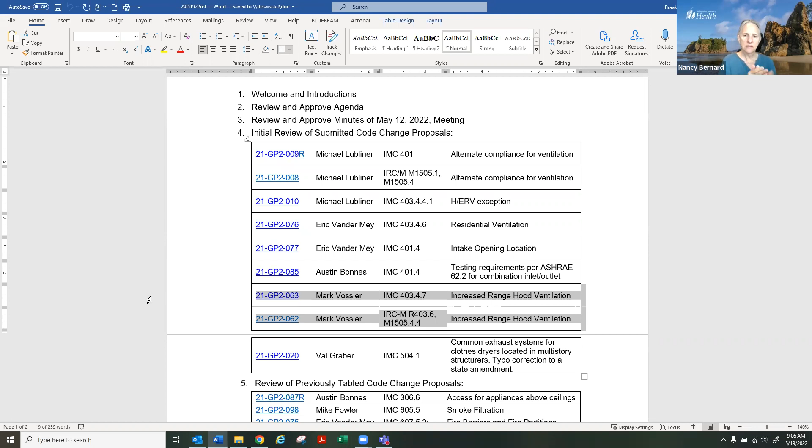I'm Kim Barker with King County Permitting, just observing today. Welcome, Kim. All right, Eric was going to join us. Yeah, I was just in a meeting with him, he's hopping on, he will be on in a second. I don't want to adjust the agenda and then mess up something else necessarily. Yeah, Eric Vander Mey is here also. Yeah, I'm here. Thanks, Eric. Welcome.

Okay, well, let's go ahead and move on to item 2, which is to review and approve the agenda. I think we heard from Mark that maybe it would be helpful to move up his agenda items. And we also heard from Kevin that his proposal that was tabled from last week, maybe so he could get moved up as well to help out those folks in their scheduling. So if someone would like to do that, it would just be a motion to move those items up in the agenda.

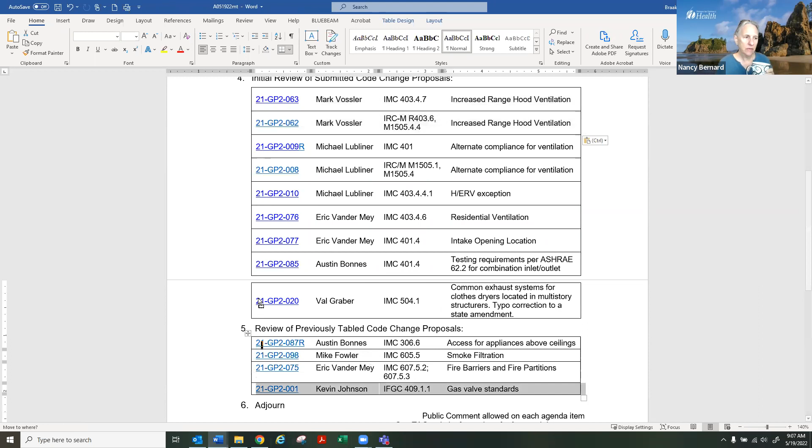We now have an approved agenda. So next up is to review and approve the meeting minutes from last week's May 12th tag meeting. So these minutes were posted with all the materials for today, so hopefully everyone had a chance to take a look at those.

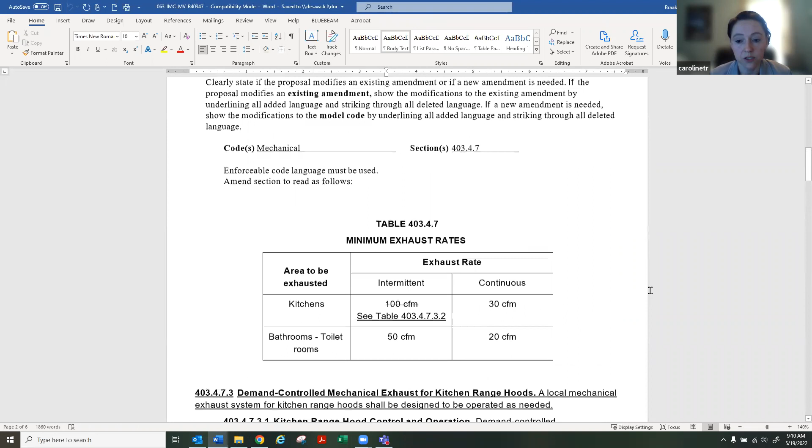So what I'm hoping to do here is similar to last week, to have the individual who submitted the proposal or their delegate present it, explain what it is, why it is needed, and what impacts it will have. Once the proponent has shared all that background, tag members or members of the public can ask questions to get more clarity or better understand the proposal. In general, members of the public are welcome to participate in all discussions, just not permitted to make or second motions or vote. Throughout the discussion, anyone can propose changes to the wording of the proposal, to improve clarity, or to change the requirement.

The tag has great flexibility in how proposals are treated. You can approve them as submitted, approve them as modified, reject them, or table them so additional offline work can be done, or so you have more time to consider them before voting. In general, now is the time in the process to ask all your questions of the proponent to ensure understanding and to propose modifications and edits to proposals, to minimize changes and edits later in the process.

So any questions about any of those process items before we dive in today?

All right. Well, with that, we will turn over the floor to Mark to talk about the range hood ventilation proposals. Thank you, Mark. Thank you. It's a pleasure to be here.

I want to be crystal clear on my areas of expertise. I'm a physician, a practicing cardiologist with an interest in the impacts of air pollution on human health. I'm not an expert in ventilation systems, but I'm coming to you with a proposal because of concern about the health impacts of indoor air pollution, and specifically the risks of gas stoves, where cooking with gas can increase your nitrogen dioxide levels in the home to levels that would be deemed illegal by the EPA for outdoor air pollution.

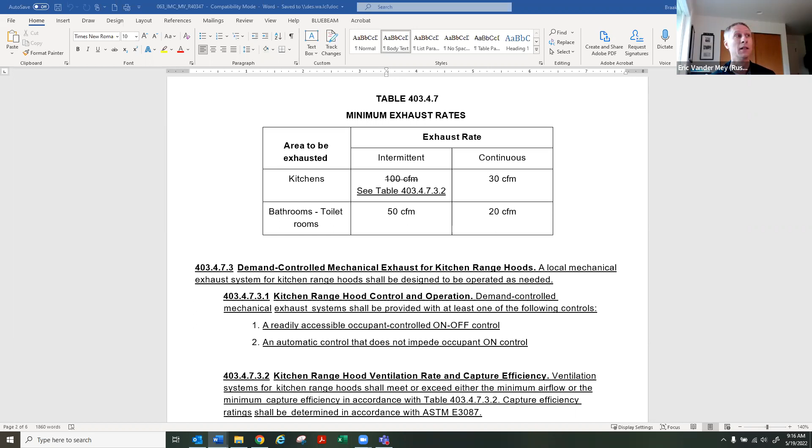Correct. The Washington State Mechanical Code does allow for local exhaust in the kitchen and recirculating range hoods, so that is an option in the code. It can still be these cheap recirculating fans that don't do much good at all if you have local exhaust in the kitchen itself. So you're still required to have an exhaust grill to outside in the kitchen - typically a continuous exhaust grill, connected to the ERV, and then a recirculating hood above the range.

I don't know, unless the tag removed that as part of the 2021 code process - that was an option in the 2018 code. Well, all the research I've seen to date, and some of you may have been following it closer, shows that you really need this capture over the source at the stove to be effective.

Okay, thanks, Nancy. I think next up, Kevin had his hand up. Go ahead, Kevin. Oh, I dropped my hand. I think Andrea's up, but then I put my hand up again, so I'll yield to Andrea. Okay, Andrea, thank you.

So we are opposed to this proposal simply because what we found in research, and the California Air Resources Board cites this as well, is that cooking what you cook - not necessarily the fuel type of what you're cooking on - affects indoor air quality. Also, the performance of vented range hoods varies by manufacturer, so they don't necessarily always operate at their optimal performance rating. We're concerned this is going to add cost when maybe the most effective form of ventilation could be utilized in other ways. For that reason, we're going to be voting against this proposal. Thank you.

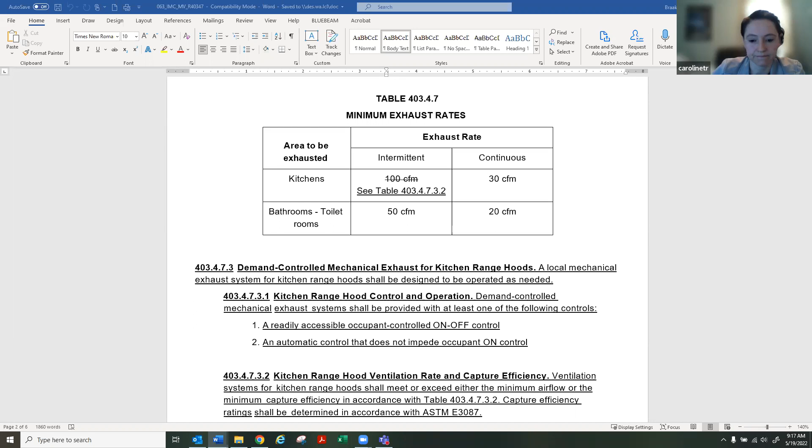Thanks, Andrea. Kevin - yeah, I had a few questions about the proposal. The first has to do with ASTM E3087. I was talking with Randy Cooper with the Association of Home Appliance Manufacturers. He mentioned that that particular standard, how did he put it - is, sorry, I think he said non-reproducible. I'll get the exact quote in a second, but the concern is that it's not a well-baked standard for capture efficiency.

Yeah, it says repeatable or reproducible is the issue. They're still working the kinks out on it, and it's difficult for manufacturers to meet it. So the industry is working on a better capture efficiency standard and are interested in having hoods that are effective. This is working its way through ASHRAE 62.2, the ventilation standard, and the issue of the ASTM test, but also these airflows. So is there any possibility of putting this off until there's a more effective standard?

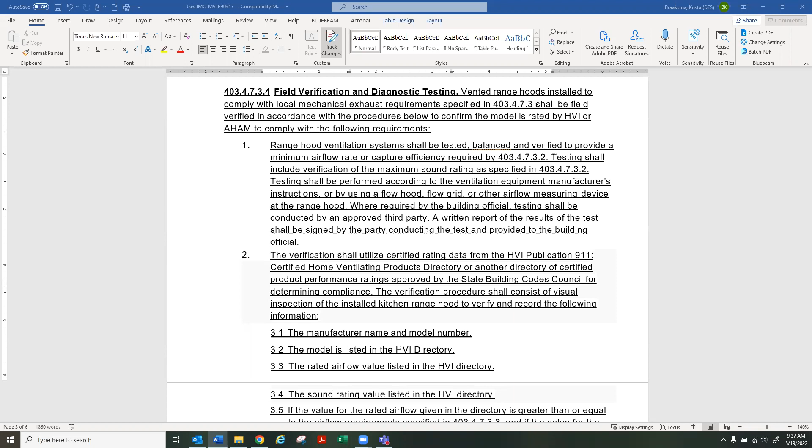And kind of in general, about the testimony here today, I think everybody agrees that the cooking process itself does put off quite a bit of contaminants in the air. Also, nuisance odors is a concern. I just wanted to pose the question to the proponent, if they would support having this increased rate that's listed right now for a gas range, also for the electric range.

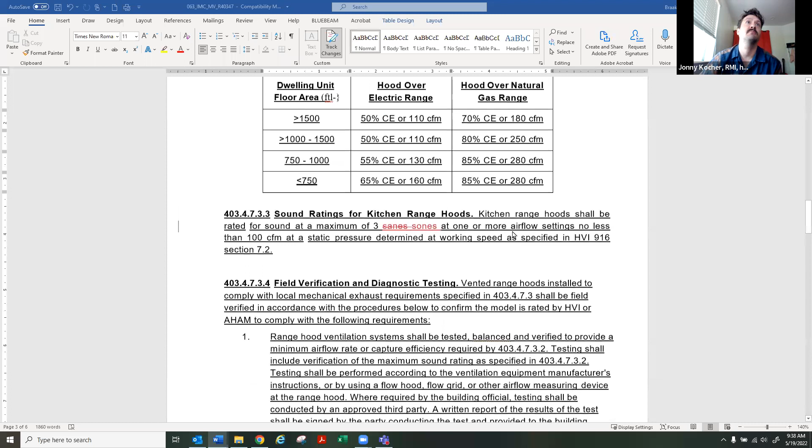Just to clarify, this would be an increase on the electric range, I believe, over base. There is a further increase over natural gas based on the research that natural gas does produce certain pollutants at higher rates than electric. And it's also a requirement for an automated hood for both, which doesn't currently exist. So this would actually increase ventilation for both electric and gas in actuality, because it would actually turn on.

Well, and I guess, is there any downside to accepting this higher CFM rate for the electric? I mean, is there any reason to oppose this higher CFM rate over an electric range? Research doesn't support that it's needed. It would be extra cost for no reason.

Does the proponent have any comment? Yeah, we're clearly not opposed at PSR to improving ventilation regardless. The concern that caused us to look into this was the increased risk of cooking with gas. To be crystal clear on that, several people have brought up that all cooking releases volatile organics and particulates, and that's true. Gas is worse, particularly in terms of nitrogen dioxide, and that's clearly a risk for asthma. And so the reason we are asking for further increases in ventilation rates for gas cooking is because it increases the risk of asthma by 40%.

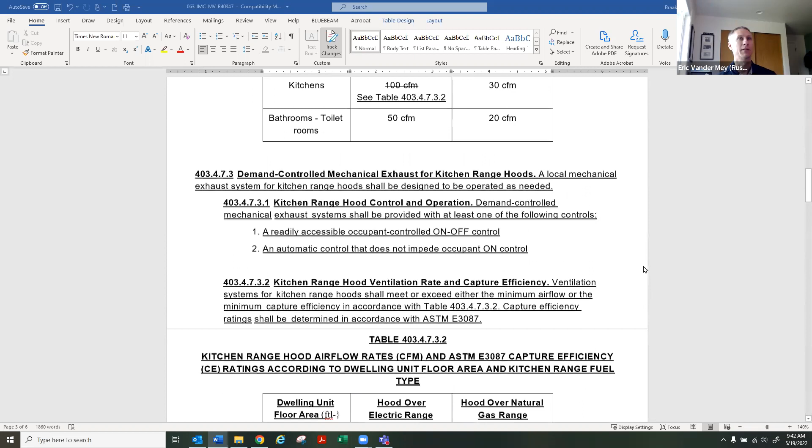So based on how I read this, since this table is only referenced by the intermittent flow rate, you could, as long as you're following the continuous path, whether you did a recirculating range or a ducted exhaust range, as long as you follow the continuous exhaust path from your kitchen with the 30 CFM continuous, you'd still be able to put in any kind of range hood that you wanted.

Thanks, Eric. Yeah, I wasn't really sure what to do in that situation, so I left it alone. But I'm open to ideas on what that might look like.

Yeah, I might reach out to you specifically because you've had a lot of great good faith questions about changes to be made, and might reach out to ask how we might be able to improve the language to be more enforceable.

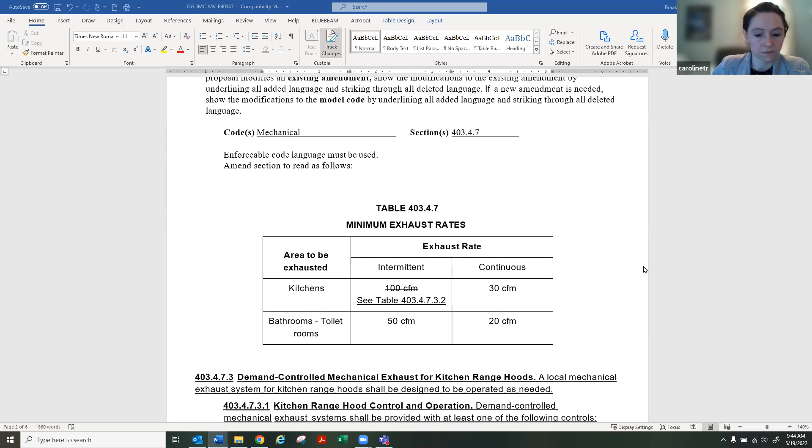Thanks, Eric. Kim. Yeah, thank you. My comment is more of a question about the controls.

I think that if this is passed, in terms of enforcement, the language in the control section could use a little bit more clarity. Currently it just says shall be designed to operate as needed.

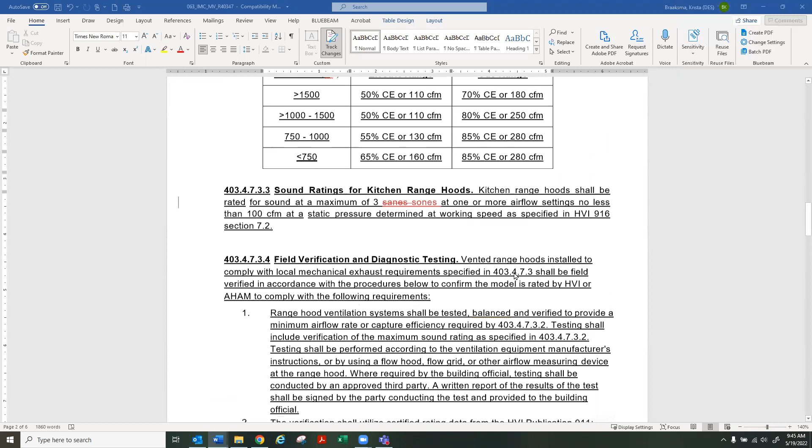So I don't know if the proponent would want to consider more specific language similar to what's in 50711 for commercial hoods, to clarify the interlock and when it needs to turn off and things, so that if this is enacted it would actually function as intended.

That's all. Thanks. Absolutely. Johnny, any thoughts there? Yeah, absolutely. I might reach out to you, Kim, to work on that. Great.

Valerie. Yeah, this table actually eliminates the use of downdraft hoods. It says hood over the range. So it eliminates downdraft hoods.

The table does. And then in 403.4.7.2, there's an exception for range hoods and downdrafts for the HVI listing. So this actually, you need to change that code section as well.

Another thing that is kind of problematic is the different CFMs for natural gas versus electricity. In a home, a lot of times people don't know if they're going to have electric or gas range, so they put both in for the owner, and the owner can change that range at any time. So I think it would be prudent to have the exact number for both, because it's kind of problematic to have two different CFMs for a piece of equipment that somebody can replace on their own.

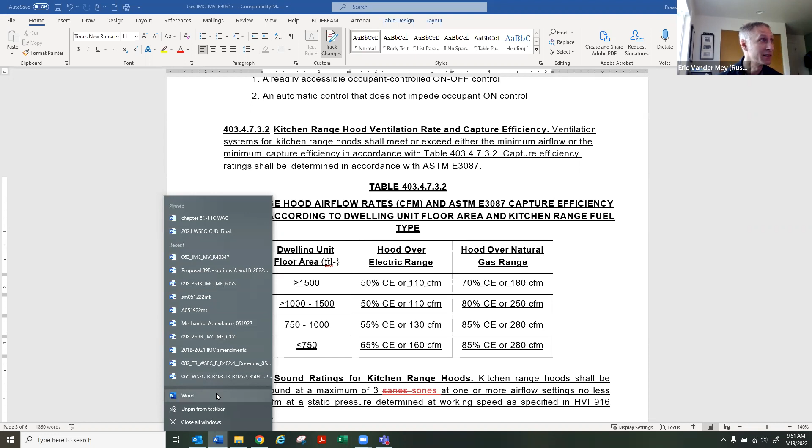I was going to try to answer Kevin's question about whether it's required to be tested. I'm looking at section 403.472, local exhaust fans. I don't know, we'd have to research that one online. I'm not finding it fast here. I know the whole house exhaust fan got codified that we have to test that in 2018. I don't think the local exhaust did. So okay.

Any other comments or questions on this one? I think before we take a motion to table, it sounds like the proponents, Mark and Johnny, have gotten a host of feedback here of things that they can reach out to folks about. It's fine to have offline meetings or working groups, just make sure those folks that participate don't form a quorum of the tag. And then I think we would look forward to seeing a revised version of this. So with that, is anyone interested in making a motion to table?

I'll move tabling. Thanks, Nancy. Is there a second? Would anyone like to second the motion to table this proposal? I'll second the proposal. Okay, thanks, Jonathan.

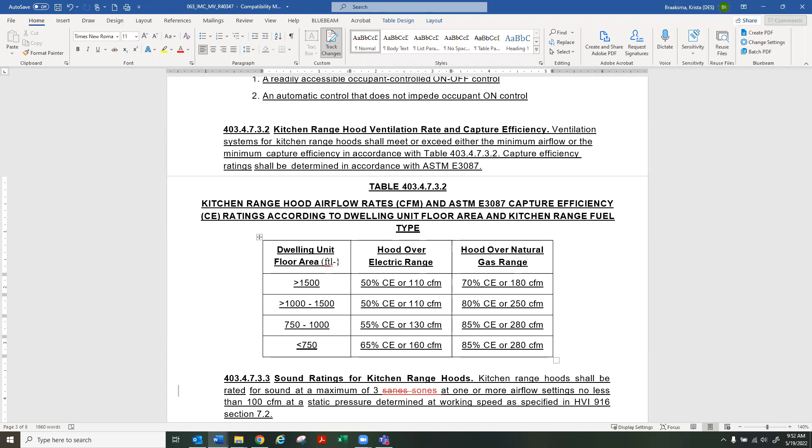Any further discussion? Actually, I don't think we can have further discussion when you table. All right, all those in favor of tabling,

I think we would, just to clarify the motion, there's two proposals, the one for the IMC and the one for the IRC. Nancy, just to clarify your motion, is your motion to table both of those for today? It could be. I didn't know if you had to pull it up separately or not. I'm assuming some of the same concerns will be there since we've talked about them. Okay. And Jonathan, as the second there, are you okay with that clarification? Yes. Okay, great. All right, so everybody's clear.

So all those in favor of tabling, say aye. Aye. Aye. All right, I only heard two voices. Hi, sorry, I was on mute. Brandon, we've got three. Any opposed? Say nay. Nay. Nay. Okay, I think that was 3 ayes and 2 nays. So the table has it.

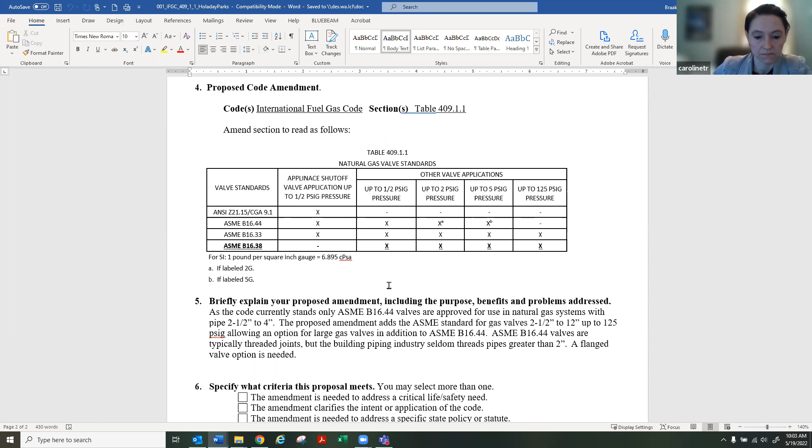Hi, Kevin, this is Valerie with the City of Bellevue. In the IFGC it requires any piping larger than 4 inches to be welded. Under fittings, you can't have a threaded fitting larger than 4 inches. So that's really the only code we have that's for welding piping, I guess you'd say. But yeah, I can see this being needed in the code.

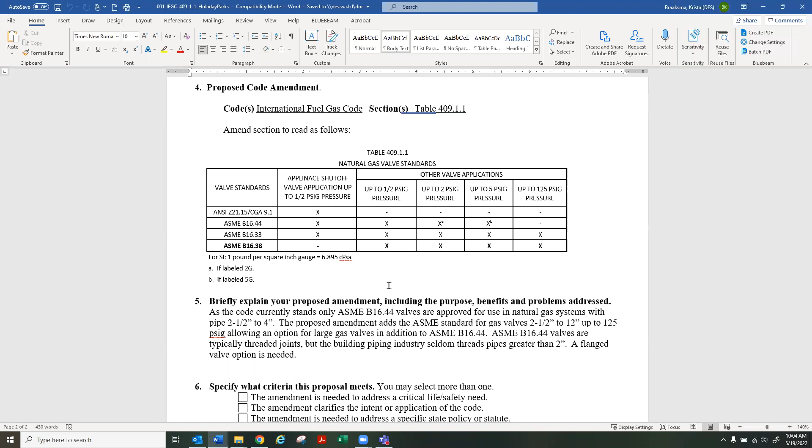Yeah. And then you will need to add it to the references as well. Sure. Yeah, okay. I haven't - I think Valerie, way back in there.

Anyway, I think you and I worked on one of the projects in the 4 towers over at 8th Avenue. I think we had like 6-inch piping, and that was low pressure stuff. That was all welded, of course. But it sort of plagued me since then that, geez, I'm putting in valves that are greater than 2-inch. And while there are plug valves and ball valves that are flanged that are ASME B16.33, those aren't specifically part of that standard for greater than 2-inch pipe.

Now the same valve - I have Apollo valves, Nibco, Milwaukee, and other valves - the same valve is both ASME B16.33 and B16.38. But because ASME B16.38 is not in the code, typically we wouldn't be allowed to install those. So I agree, and that's why we're doing it.

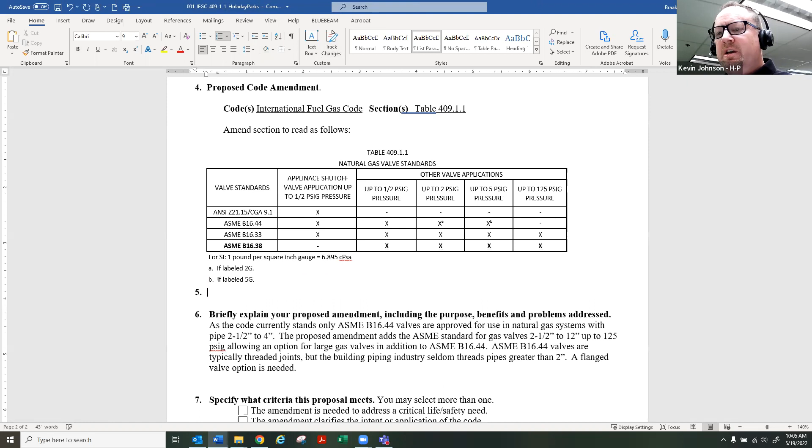I think this would give the industry a good option. And let's see if we need to put it in the reference. I guess we need to. Looks like Caroline, are you making the change? Krista's driving there, I think, just to add a note to make sure this new standard would get in there.

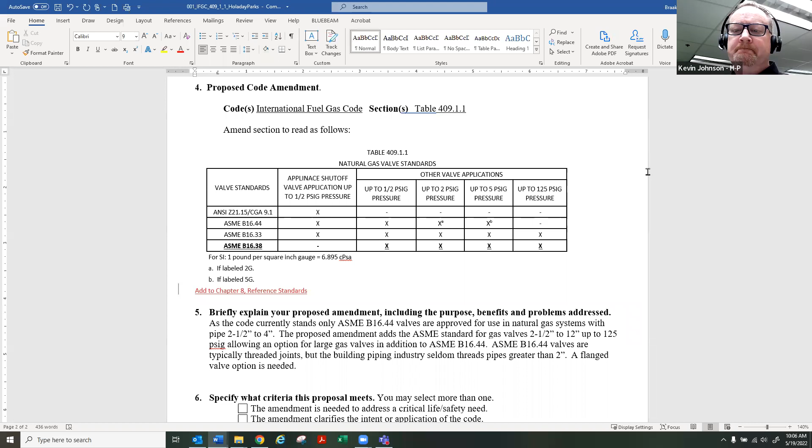So Kevin, is this seems like maybe not a Washington specific issue, maybe eventually something - it's eventually something that I think needs to go to the base fuel gas code. Yeah, okay, great. Any other questions or comments for Kevin?

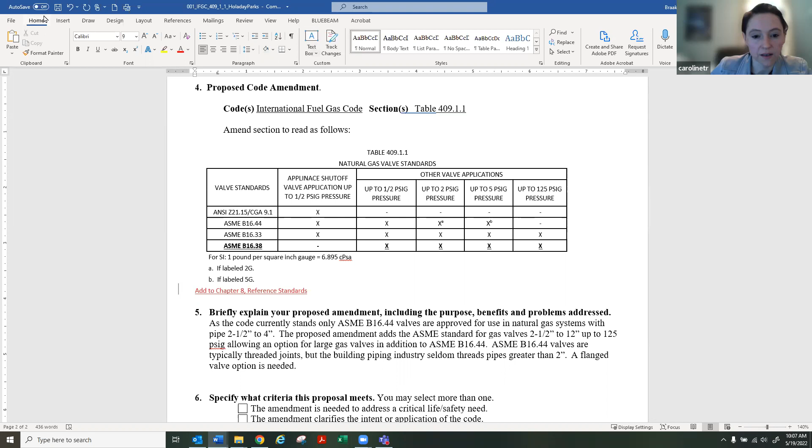Second. Thanks, Jeff. Any further discussion? Hearing none. All those in favor say aye. Aye. Aye. Aye.

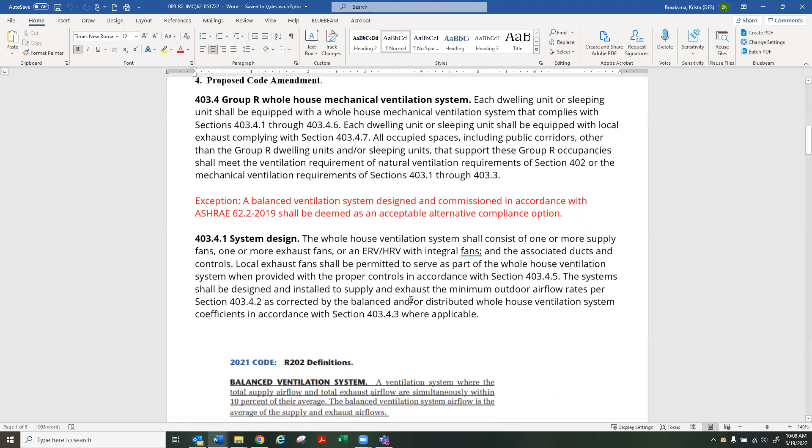I don't think I'll say prepared, but I will do my best. Thanks, Jonathan. So my understanding, this particular proposal here was just to get included the 62.2 2019 version of ASHRAE as an acceptable path as well. And I believe the term balanced was very important to Mike when he designed it, to make sure that it was a balanced ASHRAE commission system for residential R2 group R2 designations.

All right, any other background info on it or explanatory information for the tag to consider? Mike was pretty passionate about it. I believe it's a little bit more of a stringent ventilation to the mechanical. I am not 100% up on this, I do apologize. My understanding, it's just an optional path to use a little bit more of a stringent code versus going back and forth between the IRC, the IMC, and the IECC for Washington stuff.

Okay, thanks, Jonathan. Questions or comments on allowing 62.2? Eric, go ahead.

So I think this was discussed in past code cycles. The last discussion was that it would be hard for code officials to enforce multiple different standards. So I think that's why it was left out of the code. A lot of these small multifamily residential buildings, some of them don't have engineers of record because they're not required. So one recommendation to the tag, maybe if we're going to allow this, the plan set has to be stamped and signed by an engineer of record, even for small projects, to give some comfort to the AHJ.

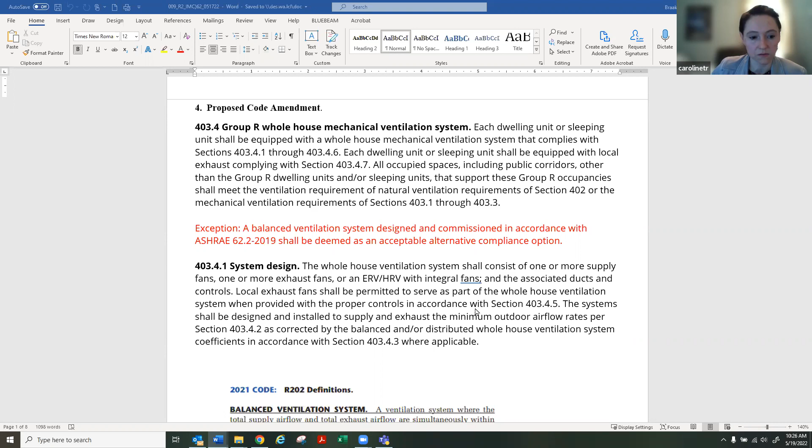You can also just reject this proposal, or we can obviously just approve it as it is. So lots of choices for tag members to consider.

Do we know if Mike is barred from doing this because of his current role and some sort of influence issue, or is it that he just isn't given the time to be on these meetings? He was not allowed to. He had to release all legacy work. Okay, so maybe it's not a conflict of interest, it's just not part of his new job. I believe it's the National Labs standing policy.

Got it. Yeah, I guess my vote would be to table this for now. I haven't had a ton of time to review, and the ASHRAE standard, I'm looking at it now, but there's a lot in it, so I'd prefer to table it.

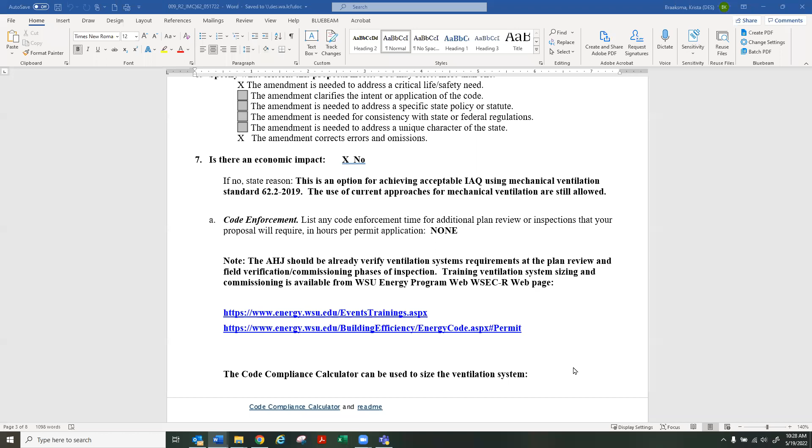Okay, is that a motion? Yes, I'll move to table this amendment. I'll second. Okay, we have a motion to table on the floor. Don't think further discussion is allowed, so all in favor, say aye. Aye. Any opposed, say nay.

So that one will come back, I think we will revisit it, I guess. Jonathan, are you kind of inheriting it to potentially address some of the questions or concerns raised today? It sounds so. So I'm sure I'll be downloading that free version of ASHRAE 62.2 that's read-only I just heard about.

Okay, thanks. And Eric? Yeah, I guess one more editorial comment would be, so Washington State Mechanical Code section 403.2 has similar language for 62.1. We might want to develop the same language as that just to be consistent, so if we're looking at alternate proposals, that language refers to specific sections, so that would be a good model to use into how to write that code to try to clarify the intent.

Thanks, Eric. Let's see. So Krista, this is the same idea, just relative to the IRC. Yes, and written slightly differently.

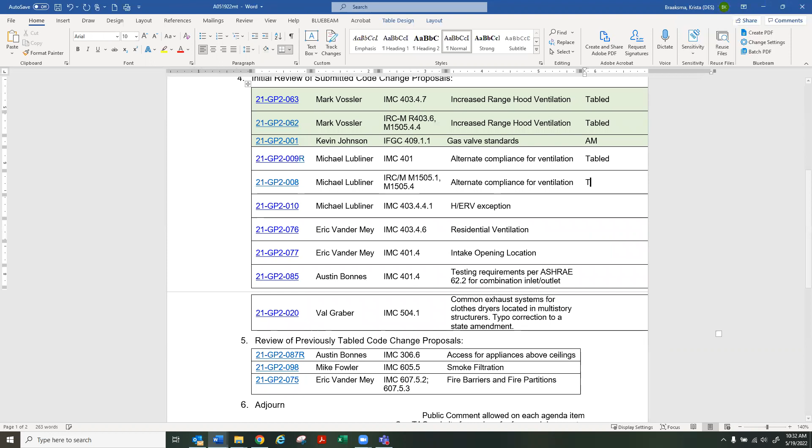And that moves us along to Mike's next proposal. Jonathan, was this one also on your radar to represent? It is. Great, floor is yours.

I believe this one is adding the exception that heat recovery or energy recovery ventilators is not required in low-rise multifamily projects. They're trying to keep it to balanced ventilation systems, right? This language here would add an exception for heat recovery and energy recovery ventilators not required in the low-rise. I apologize, I'm just trying to scroll this, but this isn't my document. I need to open mine. Could you scroll down just a little for me, please? Thank you.

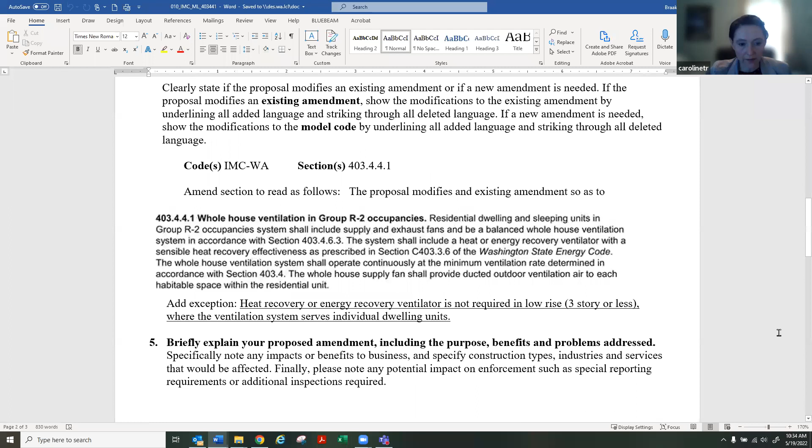Krista, do you mind scrolling back up to the actual code language? So I guess one question I had as I was looking at this one was, I think the exception could be helpful and just clarifying the requirement. But one thing that I think is interesting is that this paragraph that it would align with states that dwelling and sleeping units in group R2 shall include supply and exhaust and be a balanced whole house ventilation system. And then that next sentence says the system shall include a heat or energy recovery ventilator with a sensible heat recovery effectiveness as prescribed in section C403.3.6 of the Washington State Energy Code.

So that is the commercial energy code, and only R2 of 4 stories or more has to comply with the commercial energy code. And so that's all to say, as it's written right now, that sentence would not apply to low-rise R2 because low-rise R2 does not comply with the commercial energy code. It complies with the residential energy code. So anyway, that's all to say, I think maybe that's the logic path that gets at, Jonathan, what you're trying to do. All that said, it could just be more clearly stated, because I think the intent of this proposal, just to clarify that, might make sense.

Yeah, it's just a cleanup one, is my understanding. Okay, Eric. Yeah, I agree that the body of the code is clear, that the second sentence only applies to projects that are under the C sections of the code. That was how it was written. So yeah, assuming that there are no code proposals on the IECC residential building side of the code that would require this, then this would be essentially a redundant exception that would add clarity to the code.

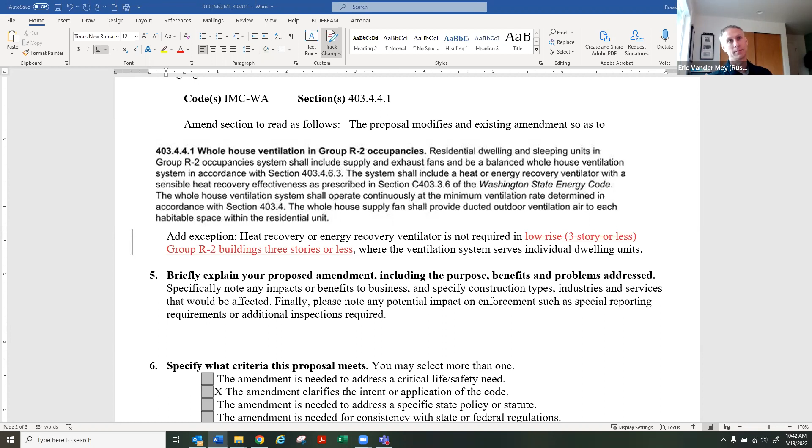And then I guess ERV, HRV in residential buildings is part of the option point system, right? So it's not required, but it could be an option point they're going after. So anyways.

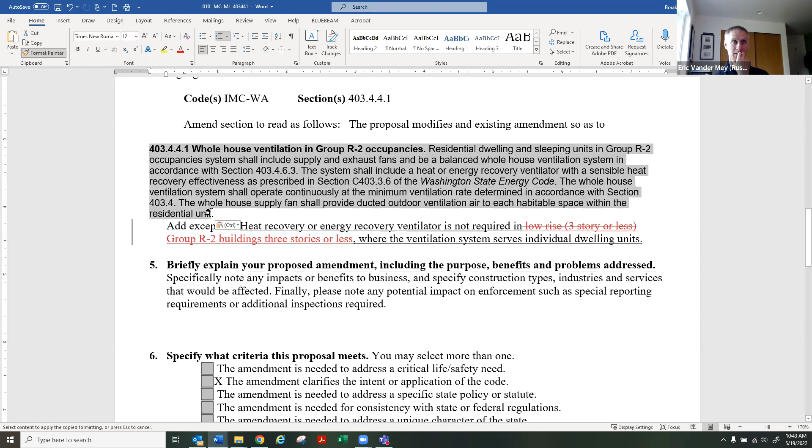Okay, well, maybe I hate to table another one. Does anyone else want to chime in with a better thought? Yeah, I guess, Krista, do you think it's better as an exception, or should that sentence just be in the body of that paragraph as additional clarification?

I don't really have a preference either way. You could say something like, where selected as an option per R406, so then it just implies that it's not required in the main body of the paragraph. So heat recovery or energy recovery ventilation is an option in group R2 buildings 3 stories or less per the...

Well, I was just thinking in the second sentence in the paragraph, you could say as prescribed in section C403.3.6, or when selected as an option as part of R406. There you go, I like that. I like it.

C or R406? R406, I guess I got to go check R406. No, you're right, it's in R406, unless they decide to move it in the energy code to match the national's R408 or something like that. It might move, it might not, I doubt it. It's going to be, you have to rewrite that section with the new 2021 section.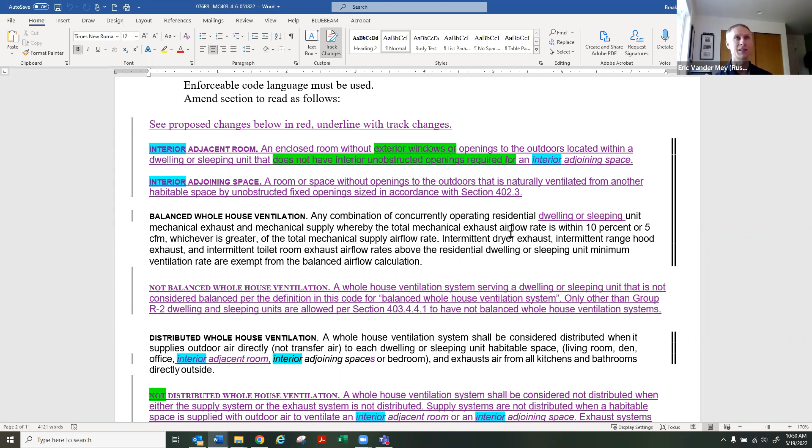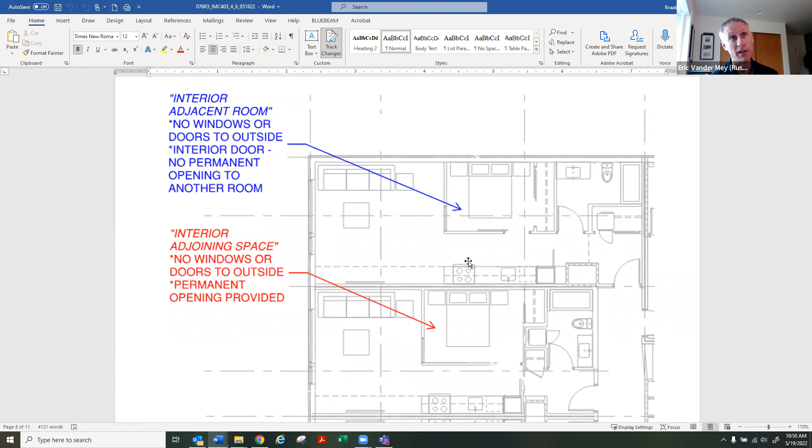Krista, can you scroll down to the diagrams at the end? So in a lot of these multifamily, we've had various provisions through the last 3 or 4 code cycles on how we treat these interior spaces. Typically, these are interior rooms within the apartments that are oftentimes bedrooms, or sometimes studies or dens within the units. Most of the time they're on the interior of the building. Sometimes you have a zero lot line configuration like the one at the top of the page here, where it's actually on an exterior wall, but there can't be any windows because it's a zero lot line configuration, so there's an adjacent building or something there.

So based on discussions with City of Seattle, they thought it would be simplest to create some defined terms. I originally had started with adjacent room or adjoining space. Unfortunately, those words are used throughout the building code in various places as undefined terms. So I chose to make it a more specific term and call them interior adjacent room and interior adjoining space, so it's a very specific term we can apply, and would only then apply to how we're using it in this section of the mechanical code.

So we're creating two of these. The basic idea is that an interior adjacent room has no openings, doors, or windows to the outside, and it has no permanent opening to another room. Most of the time, developers of these projects and occupants want a bedroom door on it, so they want sliding doors or something to close that off. And that does not meet the definition of the building code or mechanical code for an interior adjoining space, because it can be closed off—it has to be a permanent opening to meet that definition.

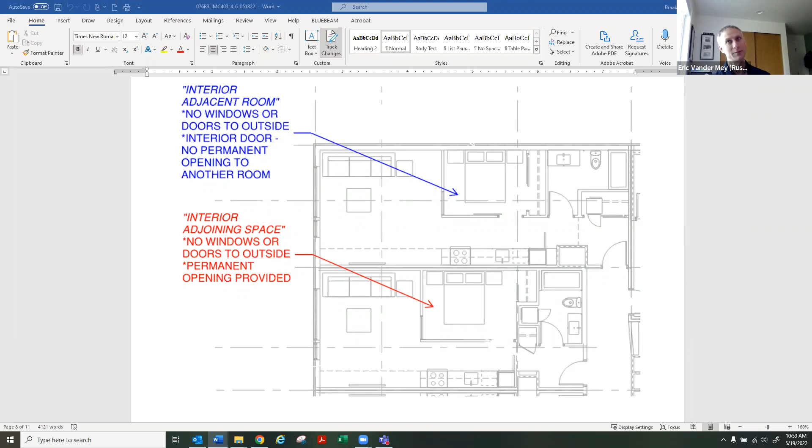Okay, so let's go through the code proposal. We've introduced a definition to describe those.

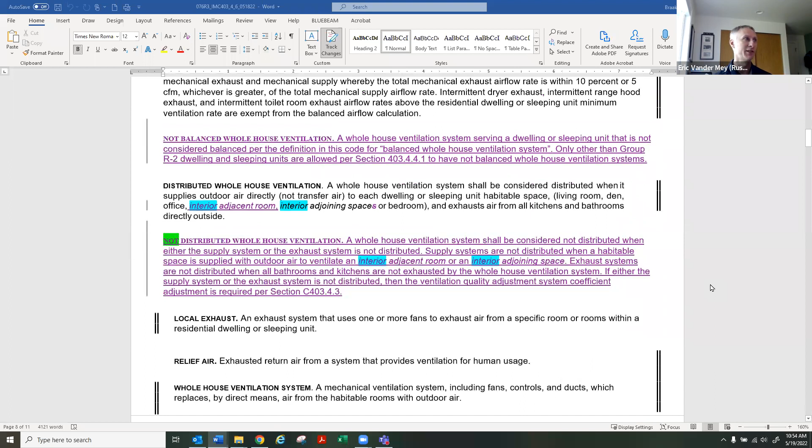An interior adjacent room is an enclosed room without exterior windows or openings to the outdoors, located within a dwelling or sleeping unit that does not have interior unobstructed openings as required for interior adjoining spaces. So that's the proposed definition for that.

The proposed definition for interior adjoining space refers to the naturally ventilated section of Chapter 4, which requires a room or space without openings to the outdoors that is naturally ventilated through a habitable space by unobstructed fixed openings in accordance with that. That section gives you the size of the opening - 25 square feet is typically what is required as the fixed opening.

So the other thing to note here is that what was unclear in our code is whether an exterior bedroom or an exterior living room, something that has a window, has to have supply ventilation to that room.

And the intent of the 2018 code was that all exterior bedrooms and all exterior living spaces have a supply of outdoor air directly to that habitable space.

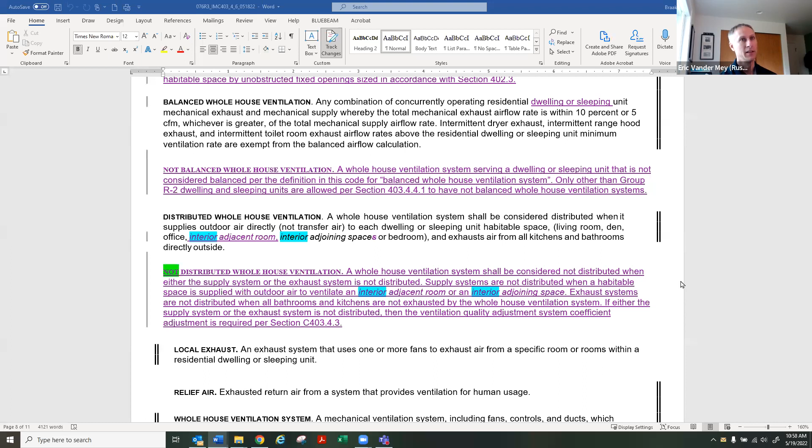So those are the new definitions that are proposed. Maybe I'll pause there to see if anybody has questions or comments on that. Okay.

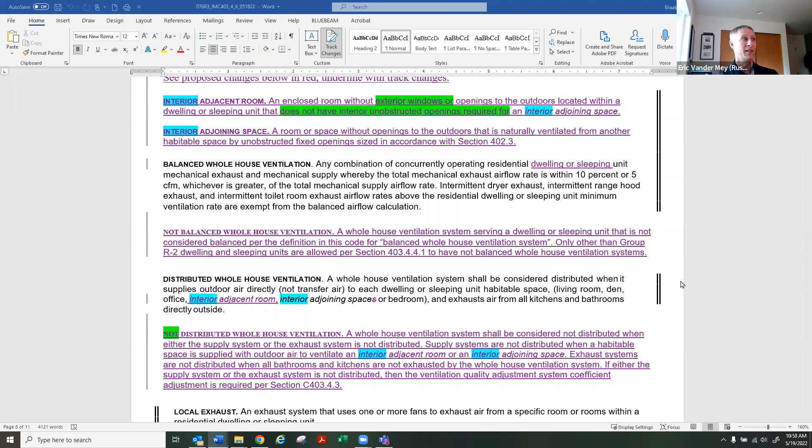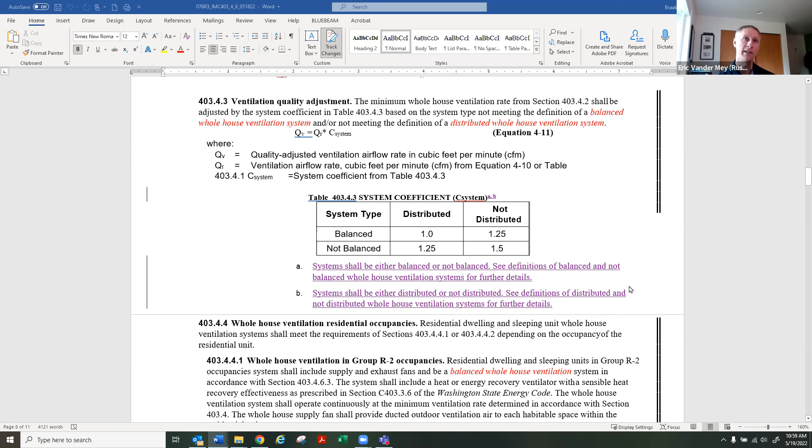So from there, we're adding some italics to the code where things didn't get italicized to distribute. And then we added some pointers to the distributed versus not distributed, and balanced versus not balanced, ventilation quality adjustment table. So now we have clear pointers to the definitions for what is applying here.

So this is where you're increasing the amount of ventilation because you're not balanced or not distributed. So those are just pointers.

So then we have our statement here that's been unclear to folks - the last sentence in section 403.4.4.1 that says the whole house supply fan shall provide ducted outdoor air to each habitable space within the residential unit. So like we said, that was required by code. There weren't specific exceptions.

And that's the statement that's telling you that you basically had to be distributed on the supply side, which was not clear in the definitions. So we have that statement that you have to be distributed. And now we have two statements saying, well, on the supply side, you can...

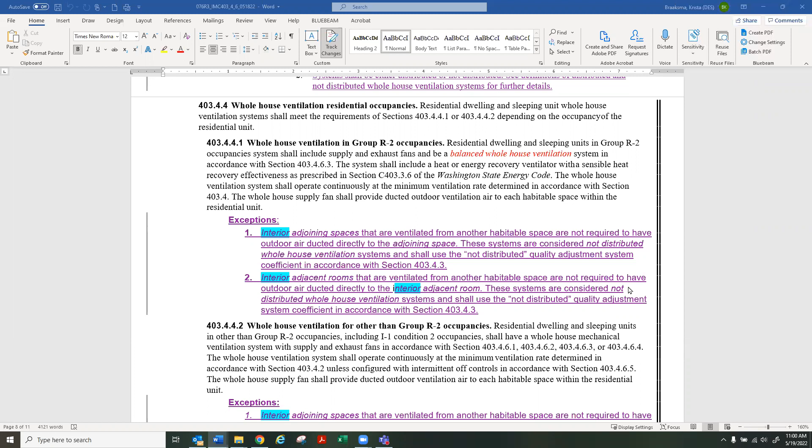not take the ducted outdoor air to each habitable space, only for the interior adjoining space or the interior adjacent room. And then it has a clear statement that if you're doing that, you're considered not distributed and you have to apply the appropriate corrections that we saw above. So those are the two exceptions to not supplying air to each habitable space within the residence.

And then we go down and we have the same statements here for the other than group R-2 occupancies. So again, if you had a hotel that had one of these interior adjoining spaces, they would now have the same exceptions or options.

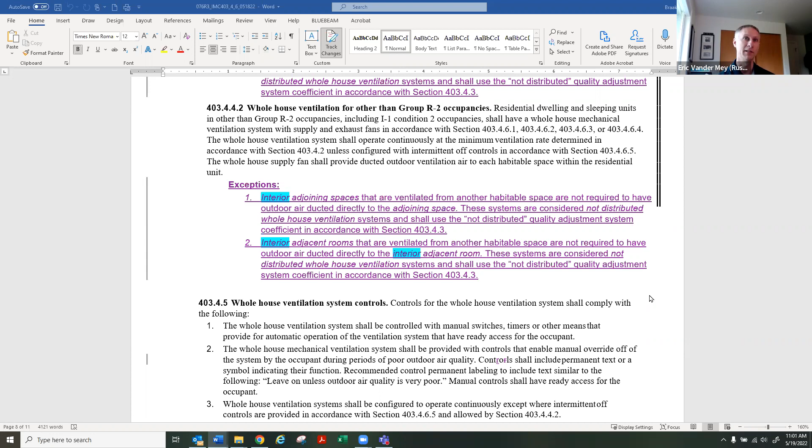So then we keep going down. We're leaving the transfer fan statement there. So if you're using the transfer fan to ventilate the interior adjacent room, you have to meet the sound ratings for the whole house fans, and you have to have ventilation and controls for that section. So that remains, but we remove the other section. This was our statement to allow the interior adjoining spaces. It really didn't get applied to the right section, and that's where the unclarity in the code kind of partially arrived from.

So any questions on that before I move on? Nancy, it looks like you have your hand up.

Yeah, sorry, I'm probably totally lost in this, but if you go back a little ways to where I think in this area, I'm trying to wrap my head around this. You've got interior bedrooms with no windows, is that correct? And what type of facilities are these? Are high-rise apartment buildings? Low rise, mid rise, yeah, we see these all over the place, yes.

Okay, just from a public health perspective, that's horrifying to me. And now you're saying that they're not getting ducted outside air to these interior bedrooms. They're getting air from other rooms with other activities. Correct. Within their residence, we've allowed this for the last 3 or 4 code cycles to have a transfer fan to either have the permanent opening that's 25 square feet, or have a transfer fan if they're enclosing them.

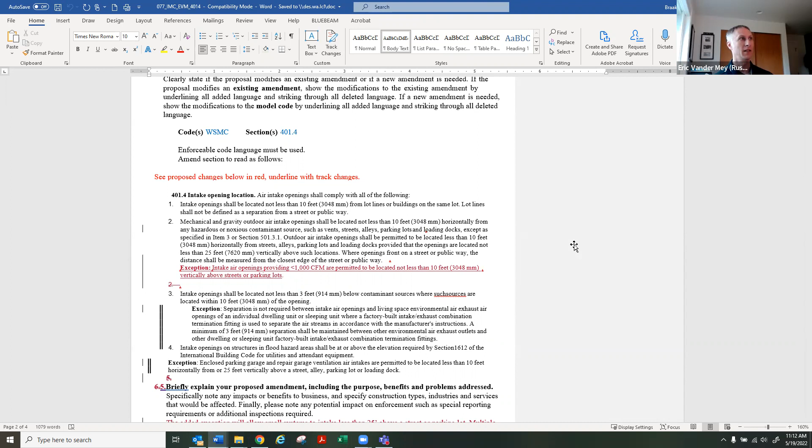This one is from Reed Rushing. Eric, are you going to be speaking on behalf of this one? Yeah. Okay, take it away. We've done a bunch of research since this - I guess I forgot to forward that.

Intake locations, section 401.4 - this section's changed over the code cycles. Item 2 essentially says all intake locations have to be 10 feet horizontally from a street, an alley, or a parking lot. And if you're not 10 feet horizontally, you have to be 25 feet above such locations. So we've been recently working on some projects that have essentially parking directly below - these are kind of rural area multifamily.

So we have a single level of parking under, and then maybe 3 or 4 levels of residences above, directly above the parking area. And so there's no way to get an outdoor air intake for every ERV within that first story above. So you have to essentially, we're calling them on the project snorkels. You're taking a snorkel up to the floor above to get 25 feet above grade, essentially, because you've got an open parking garage directly below your facility. And so it's an extreme cost for all these little 100 CFM intakes for every residential unit.

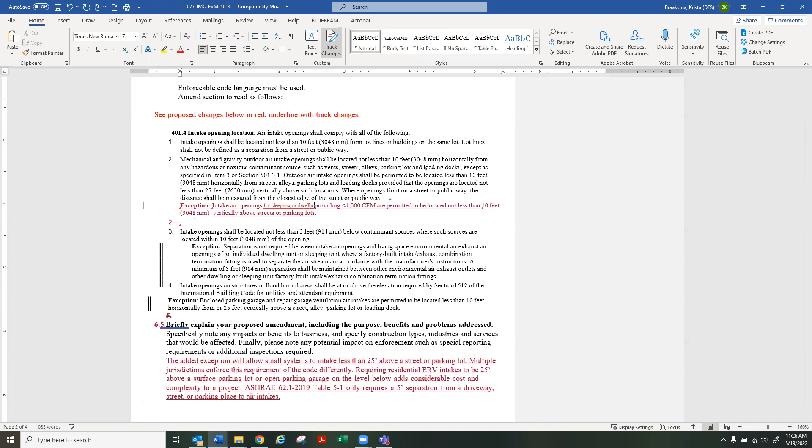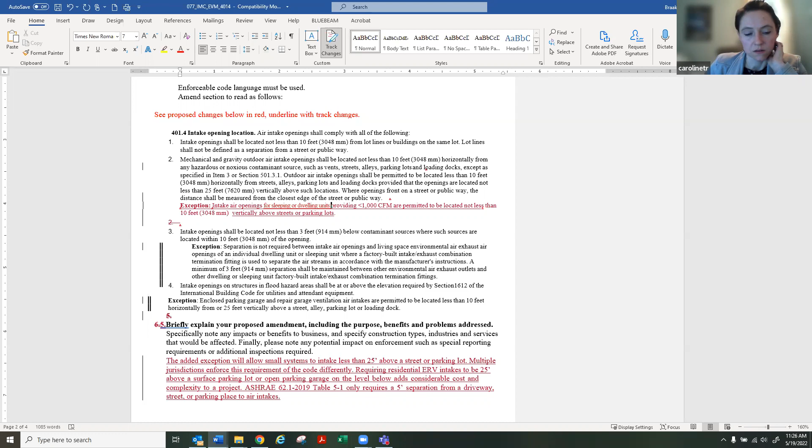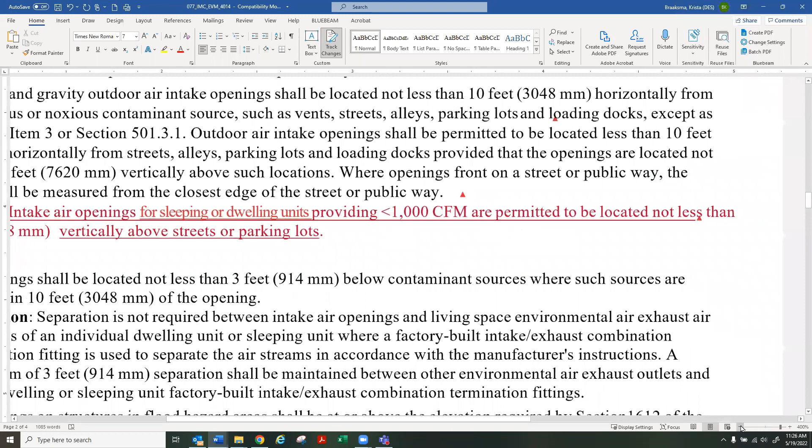No, those were my only comments. Thank you. And I'll also get rid of the public way, number one. Yeah, I'll fix that to match the model code.

So I think we're probably looking for a motion to table, and then Rushing will fix this and send it back. Okay, Nancy, unless there's other comments.

Yeah, now you've got me worried about all these apartment buildings going in along the freeways. They're problematic anyway. But the higher up you grab the fresh air, the better off it's going to be. Not that I wouldn't like to see apartment buildings not along freeways, period, but that's what's happening. And then I hadn't even thought about Bellevue. I mean, anytime you're dealing with the street, you're dealing with a lot of air pollution.

So Nancy, from your side, you'd probably want this separation from the parking lot where there's a lot less - the parking stall locations. It's not just the parking lot, it's streets, traffic. Right, streets. So if we remove streets, it would be more palatable to you. And freeway, I mean, the higher up you pull your fresh air when you're away from these ground level sources, or in the case of freeways, they're not really ground level pollution sources, the better off people are going to be.

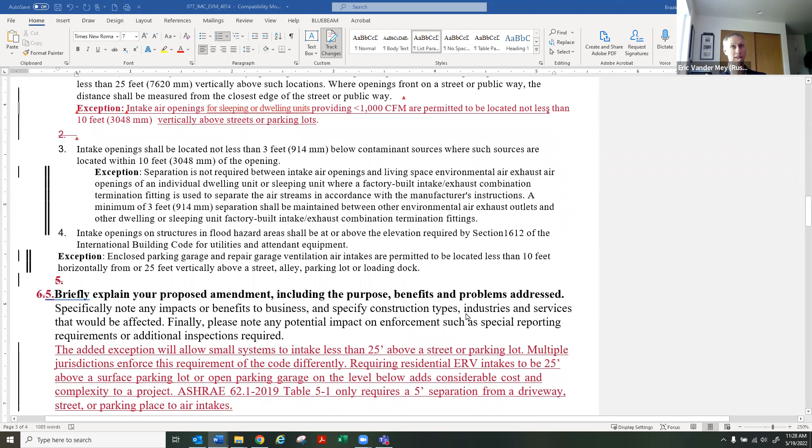That's all. Yeah, I mean, it's not only the ductwork to go up, but then you're putting a two-hour shaft around that duct so that you're not on the floor above. So your snorkel is separated from the floor above. So it's costing floor space in the residence above, and it's costing the cost of the shaft and such. So not really a shaft, but the separation to keep you separated from the floor above.

I guess maybe just the comment would be if there's an estimate of cost savings potentially from this exception. They would have to have a fire damper if they ran through a residential floor to the next level. So they would have to shaft it or have a fire damper in there. Yeah, so you're either fire damper or an enclosure to separate yourself from the floor above.

Okay, so I'm hearing Eric wants to go do a bit more work on this one, taking into account some of the feedback from the tag. Any other thoughts or comments for him to consider?

All right, hearing none, I think we're looking for our favorite kind of motion today. I'll move to table it. Thanks, Nancy. I second it. Thank you, Valerie. All in favor, please say aye. Aye. Aye. Any opposed, say nay. Okay, great. Thank you, Eric.

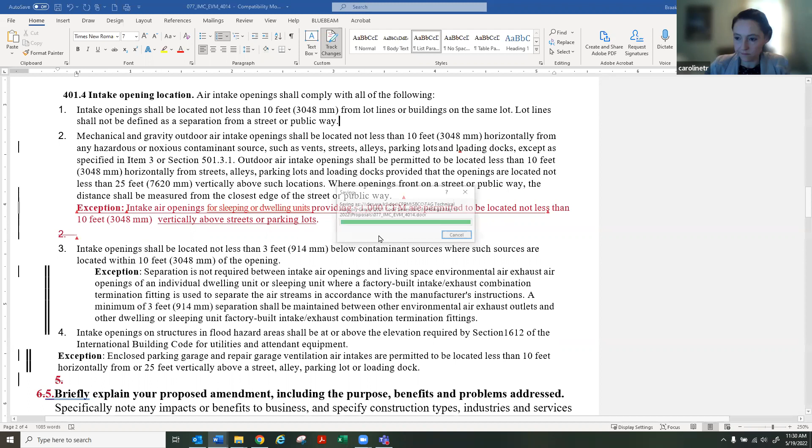Okay, I think that moves us along to proposal number 85. Austin, talking about testing requirements for combination inlet outlets. I don't know if Austin is still - yep, I'm still on. Okay, great, the floor is yours. Yeah, thank you.

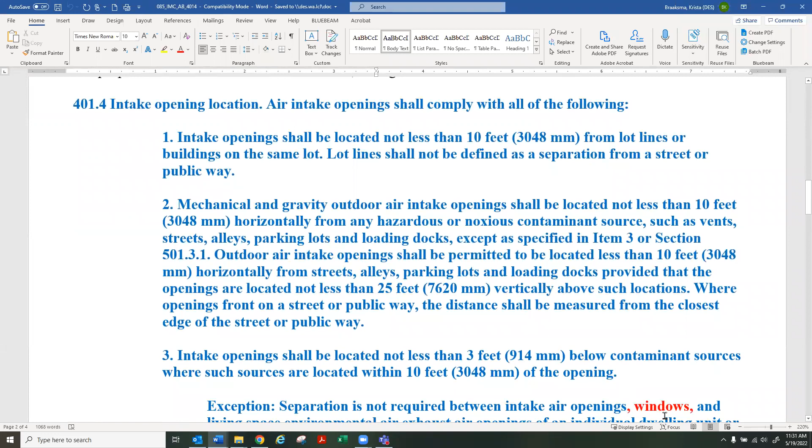So this is just trying to fix some code language to make it more enforceable. There are combination terminations that we're looking at, and we're finding it challenging to get manufacturers that - they're always generally less than 10% when it comes to, I don't know what's the wording they use, air mixing when it comes to these air combination fittings. And so it's just to allow the code to allow for these manufacturers that can go up to 10% to be able to be used. This is just specifically laying out that kind of wording. And then I noticed there was just a spelling error or something on the Windows, and so change that.

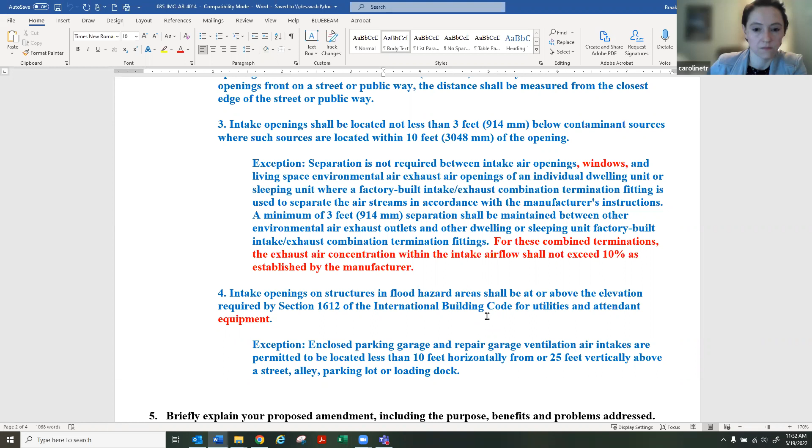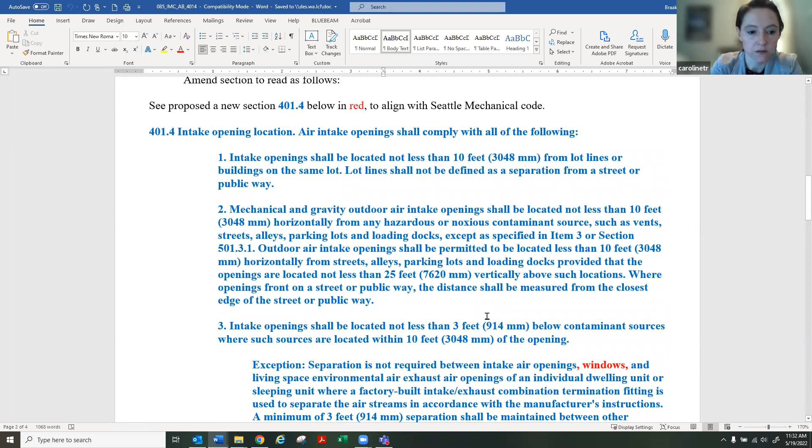So I don't know if there's any specific questions. I can dive into this a little bit more, but to me I thought it was a bit straightforward, just helping to make it more enforceable. Thank you, Austin. Any questions or comments for Austin on this proposal?

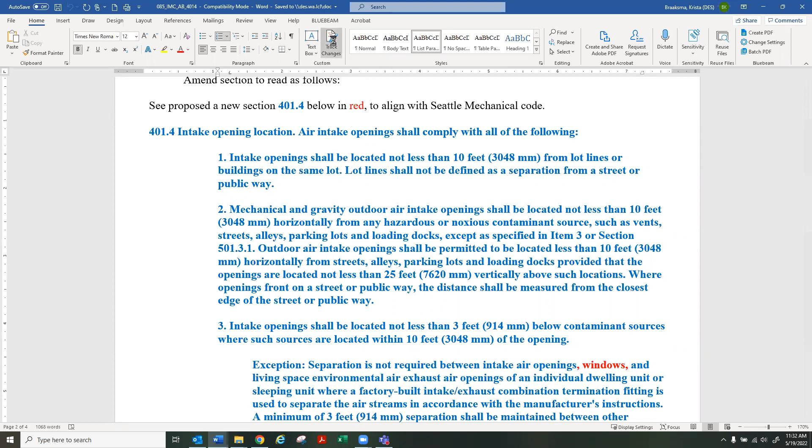Yeah, you used the wrong code section on number one, there - that's not base code, the separation from the street or public way. I think adding windows is good, that adds a little bit more clarity for somebody. The 10% leakage by manufacturers - I've seen a lot of ERVs that have some pretty cheesy concentrics that go along with them that are just PVC pipes that are glued together, and they call that their factory manufactured fitting. But I do agree with this one.

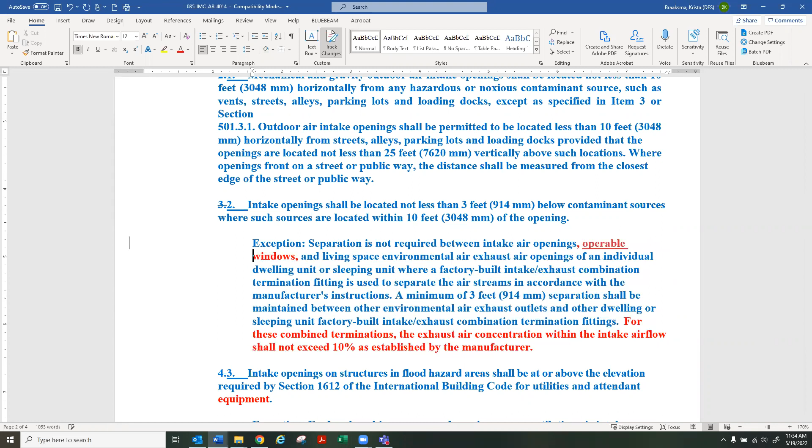Austin, should the separation be to operable windows or just windows? What are we trying to achieve there? Yeah, it's air openings, windows. So we could change it to operable windows to make it more specific. Or operable window openings? Yep.

And then I guess, do we want to reference the ASHRAE 62.2 section like I proposed in the other proposal here, to provide a pointer to code officials for where that criteria comes from? I mean, this is just matching up with the ASHRAE language, but they don't really go into it further. Right, I believe so. I don't see a benefit, but we could. Okay.

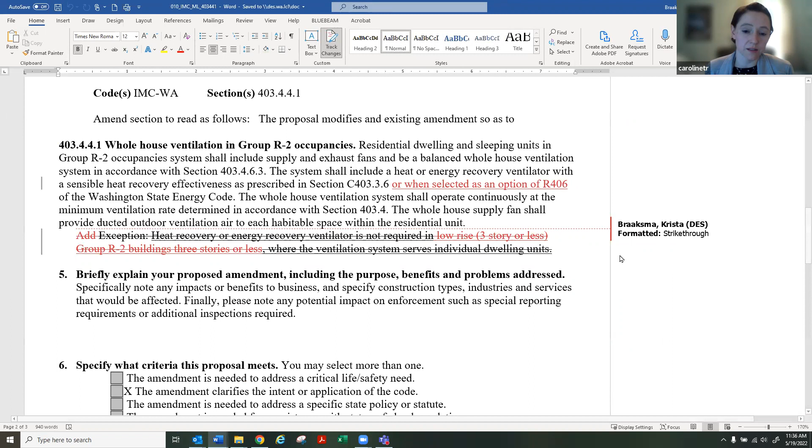So I guess to keep things moving here, Mike, I think as Eric just noted, most proposals have been tabled today. So there's certainly an opportunity to send those comments to proponents for them to consider, in addition to the many other comments and thoughts they received today. There's still lots of time for collaboration and improvement on any of those things. Okay, yeah, thank you.

So the comment that I had on this one, I'll try to be brief, is that 62.2 has this requirement for the 10% separation. I took the same language from 62.2 for the approval of the combined intake exhaust termination. And I took that to the IRC and the IMC, and ultimately I got a lot of feedback from building code officials saying, hey, we don't want to do special approval of these units. And there's no recognized, standardized test method out there for figuring out the concentration of the gas in the intake that's emitted by the exhaust for these units.

And it was pointed out to me that the I-codes right now basically deal with combined terminations for combustion appliances by addressing it within the manufacturer listing, so that if it's listed with the manufacturer, it's good to go. And I found a Natural Resources Canada reference that looked at these terminations and also interviewed various manufacturers that make these, and I wasn't able to identify any appreciable, significant difference to say that we should require special approval of these and special documentation with manufacturer data.

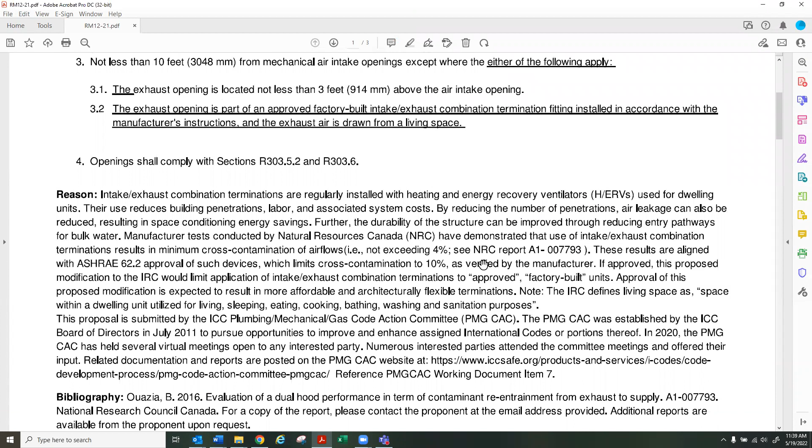Thanks, Mike. Appreciate that. Nancy.

Okay, well then now it sounds like this might get altered. My question is, and maybe you were just saying we don't know, how do we even know that it's not exceeding 10%? And why can't we get it lower? We really don't want entrainment of exhaust. Were we discussing these type of fittings back in our first set of meetings? Are these what we're talking about?

I think you're right, Nancy. I think the topic did come up when we were reviewing the 2021 codes, and this being a topic that we wanted to address in this portion of the process. Nancy, was your question to Mike? I don't know whose co-proposal it is. I guess my question is, is 10% what people have accepted? Or can it be lower? And can you even make sure that it's not exceeding 10%?

So the 10% initially came from 62.1, where there's a requirement that with an HRV, you shouldn't have any exhaust air transfer within the case from one side of the heat exchanger to the other, basically, of 10%. And there's no, I don't believe that there's a citation to a test procedure for that, but 62.2 just picked up on that 10% reference and said, okay, for these combination termination units, let's just say the same thing, that we think it shouldn't be more than 10%.

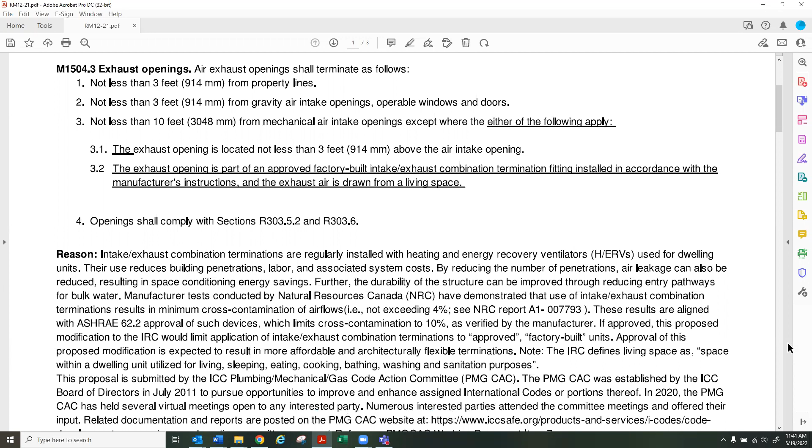Krista just showed an IMC proposal that references a test that was done by Natural Resources Canada, a tracer gas test that showed less than 10% cross-contamination for typical units. It's not a standardized test, but I'm not aware of any products that don't achieve this, and there are no complaints, et cetera.

I was also just in a 62.2 meeting where they're talking about reducing the minimum separation distance from that traditional 10 feet to something right around 5 feet or potentially less, even for things like kitchen exhaust from natural gas fired stoves, based on wind study data. And those are airstreams that aren't designed to diverge at the termination. So all the data I'm seeing right now is pointing to this being less of a concern than it initially was thought to be when this language was put into 62.2.

Okay, now you got me concerned about them lowering it. Winds vary. Yes, and this was a wind study test done at many different speeds, based on the worst case scenario and maximum, very conservative assumptions, maximum concentrations, et cetera.

So this proposal is basically to add operable window openings, which is another air intake. And this last line in red, but from what you're saying, this is a given. Right, there aren't any units that are known to perform worse than this, to my knowledge. Okay, that's my questions. Thanks.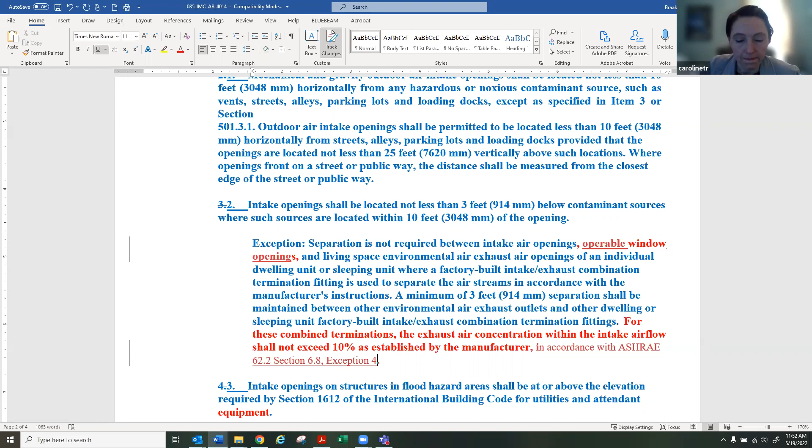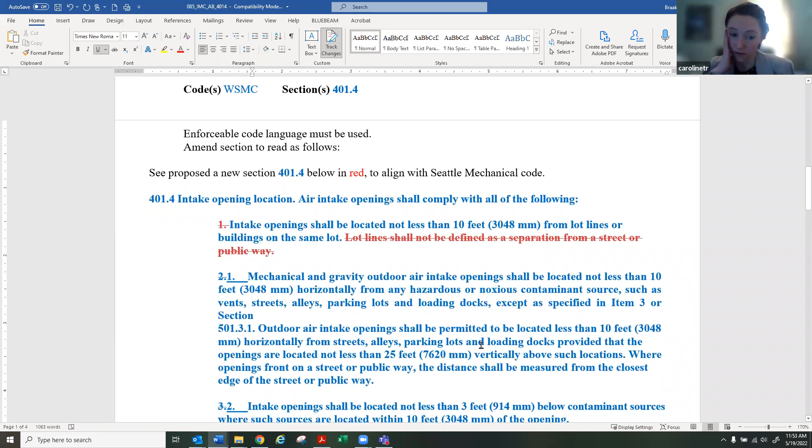And Valerie had made a comment about the base language. Is that something that we still need to double check? It's the base language has to do with item 1. That sentence shouldn't be there. So that was the only change. Yeah, that was the only thing I saw that needed to come out.

Okay, thanks. Well, we can, if folks are ready, certainly vote on this one right now as is, or if tag members want to suggest other modifications, we'll leave it up to the group on what you want to do with this one.

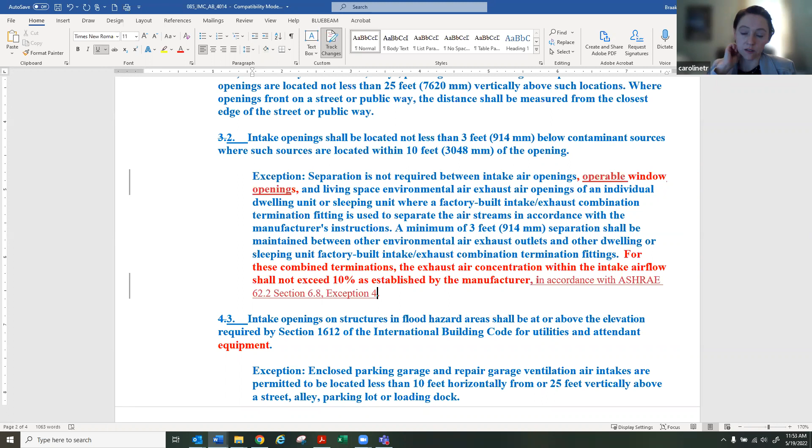Yeah, I guess just to recap, it seems like the choices would be to approve it as shown on the screen. There's an option to reject it entirely, or I think part of what we were hearing was to potentially strike that whole last sentence of the exception and have that as a different version the tag could recommend. I'll move approval of this one as written to get the ball rolling.

Thanks, Nancy. Is there a second for that? I'll second that. Okay, Jonathan seconds it. Any further discussion? So we're talking about both those edits shown above, number 1, or struck out number 1, and down below the exception. We are right now voting on approving what is shown on the screen.

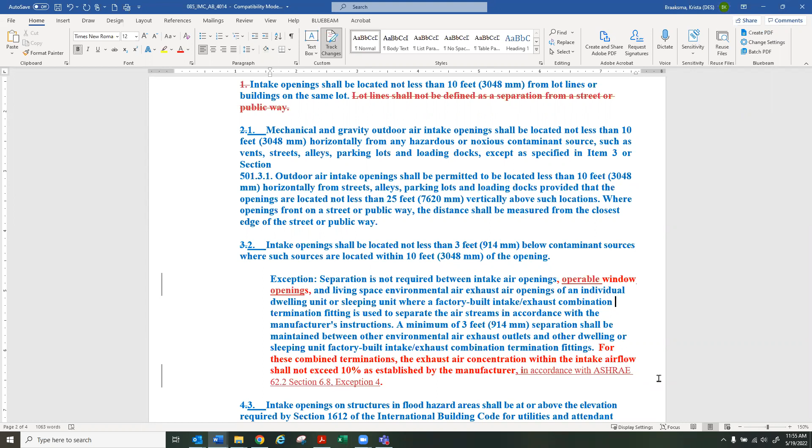Okay, got it, just to be clear on item 1, it's not part of the code. That's part of the Seattle code that shouldn't have been part of the code proposal. Oh, gotcha, it'd just really be erased. Thank you. Thanks, Brandon.

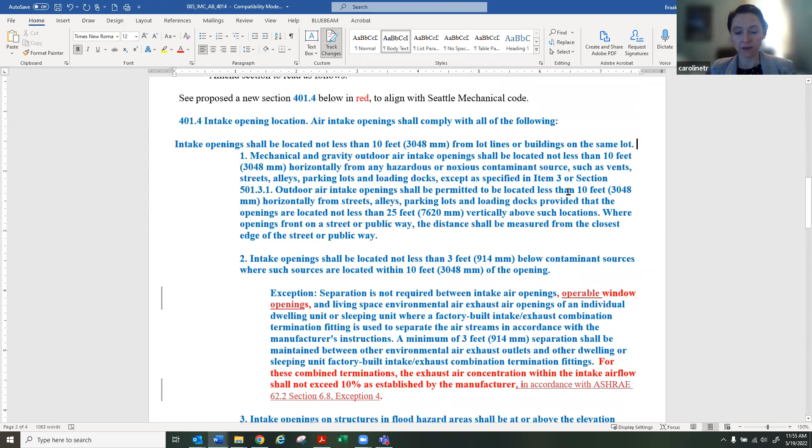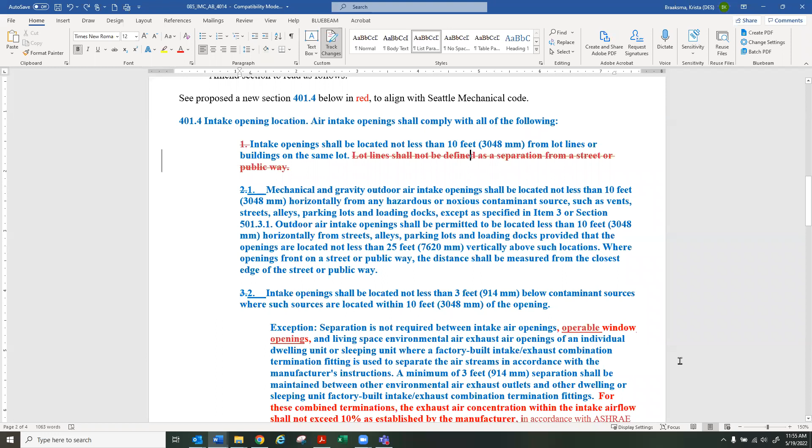Any further discussion? Mike: I want to say operable fenestration instead of window openings, just to cover doors, windows, that kind of stuff, or is the desire just to address window openings there? Yeah, I guess the broader term would be operable openings. I'll accept that for my proposal if that's necessary. Thank you, Nancy. Jonathan is the second. Is that modification acceptable to you? Absolutely. Thank you.

Your typo correction, Austin, turned into a major change. Yeah, I guess.

Okay, don't see anyone's hand up, so we will go ahead and vote on this. We'll try a voice vote first. All those in favor, say aye. Aye. Aye. I think I heard Nancy and Brandon in favor. Sorry, was anybody else who said aye? Yeah. Sorry, was that you, Valerie? Yeah, I said aye.

Okay, all those opposed, say nay. All right. Did everybody vote? I don't think I heard from Jonathan or Andrea. Are you guys abstaining? Yeah, I stepped away, so I wasn't super up to date on everything. So I'm going to abstain for this one. Okay, thanks, Andrea. And Jonathan? Yeah, the same here. I was just going to defer to the group wisdom.

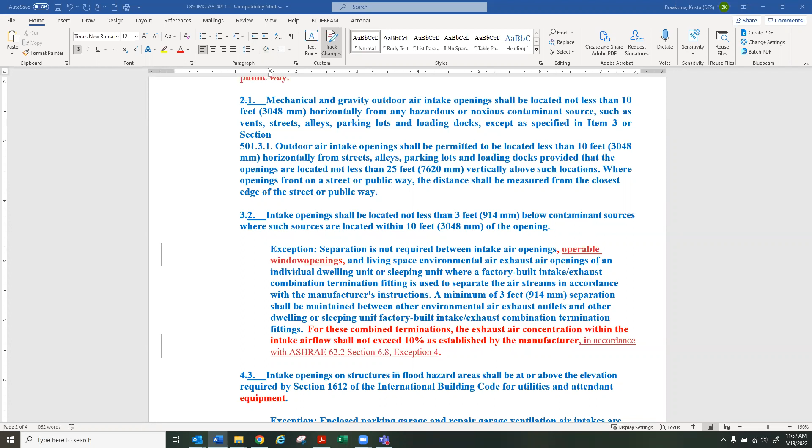Okay, I think we had 3 ayes. Is that right, Krista? I think so. For some reason I was hearing 4, but we don't have 4 members that were there besides Andrea and Jonathan. Okay, should we do a roll call on that one just to make sure? We can if you wish. I think it's clear as long as everybody's good with what I think it passed with three ayes: Nancy, Brandon, Valerie, and then we had 2 abstentions, I think is what I had heard there.

Great, I think we made it through almost all of them that we had of the ones we hadn't yet discussed. I think the only one we didn't make it through was Valerie's, which is just a typo correction one. So that one should be pretty straightforward, actually. Yeah. Okay. Yeah, I don't think this one even needs to go in front of the tag. Okay.

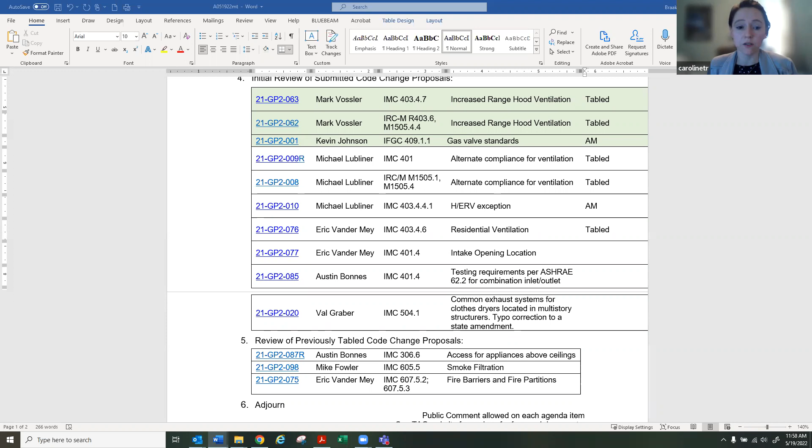Great. Well, that means that next week we will only be revisiting everything. So everything we talk about next week, we will have already discussed once. So for proponents who are returning with modified versions, it would be really helpful if you could be prepared to highlight some of the concerns that were raised in the first discussion and how you addressed those in your revised version, just so we can stay on task.